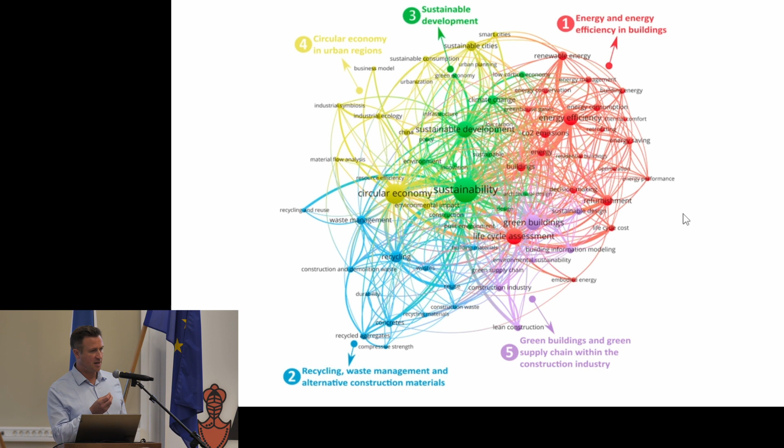Most of the time, when you explain that to people, they are ready to do something, but they don't know where to start, because speaking about carbon neutral is important, but what does it mean in my daily action, in my daily business? The idea with circularity is that it's the perfect translation of all those theoretical concepts into a daily business activity. That's what I'm trying to explain in this presentation.

So what is circularity? The best definition for this terminology is to compare it with the actual model - the linear economy. In the linear economy, you see your material as waste: you produce it, you use the raw material, and once your product has been installed on a project, after its lifetime, this product can be seen as waste. Last year, a lot of suppliers made important steps with recycling - the recycling economy was a first important action because some of the waste is reused to produce new material.

But when we speak about circular economy, that's the following step, and that's the goal for 2050 - we need to avoid any waste on the project. So it's another level for the goals.

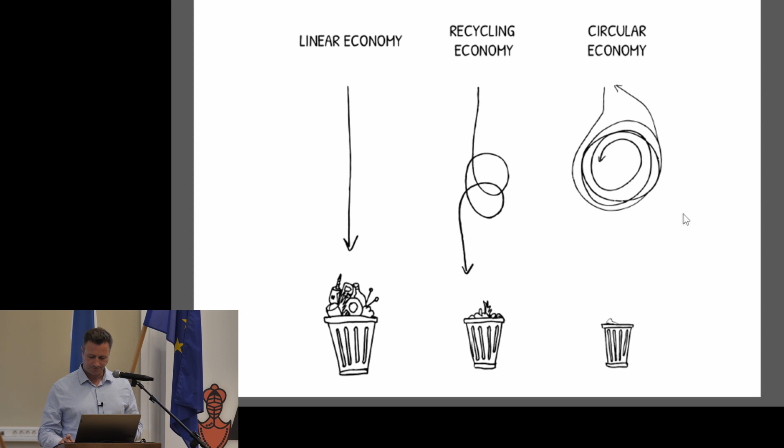The second part is what we call urban mining. Urban mining is actually seeing the material in your building a little bit similar to money you put in a bank - the materials are values, the values of tomorrow. So what do you want to do with those materials when you put them on a building?

And the final phase is what we call the new business model. I'll give you the example of a project with a large flat roof, where you've got a bank who wants to make an investment, and by putting solar panels on the roof, is renting the roof to the building owner.

So you have a sort of collaboration between different partners on a project. You generate value with the available surface. That's the third model.

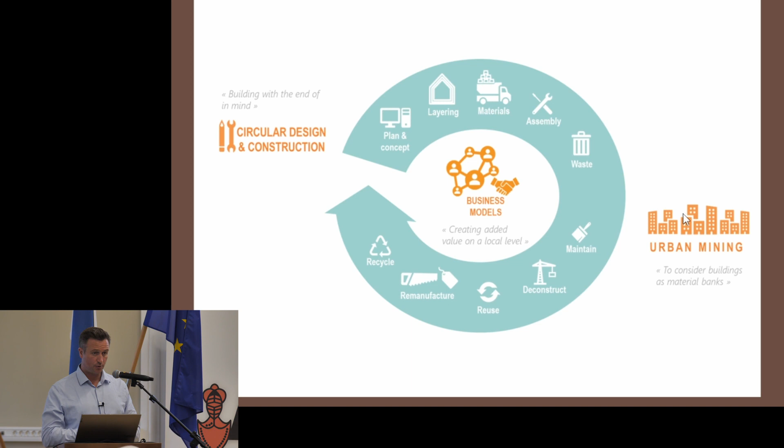What we are doing with our IKO Atelia solution is that we are trying to offer a solution to go from this linear way of thinking, where the material is produced, delivered on the project, built on a site with the application of different services, to go to waste. We are going to this circular world, and we are proposing different pillars.

We will present you 4 important pillars where we built our IKO Atelia solution. We will act on the life expectancy with good repair and good maintenance. We will act on the reusability with demountable systems, and the recycling material, the material we receive after the deconstruction, will be recycled for the production of new product. And we will also show you how we offer services to be a part of the project, also with a specific guarantee for IKO Atelia project.

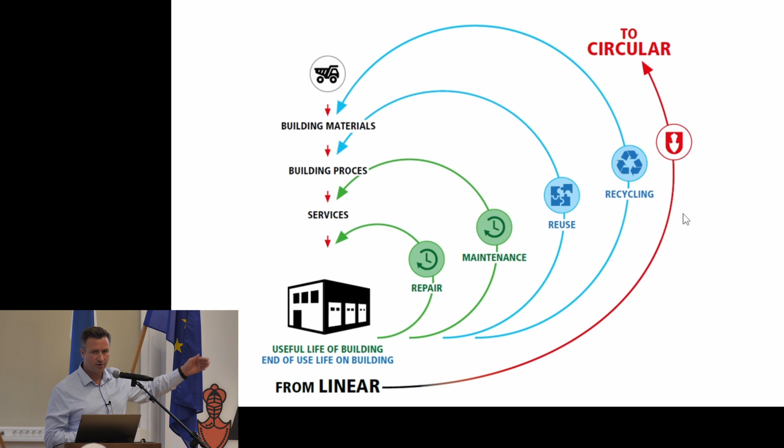The first important pillar, really strategical, is the extension of the life expectancy. The longer your material lasts, the longer your raw material stays in the circle of construction, the better it is for the planet. Really logical: if you apply good maintenance on your project, you will extend the life expectancy.

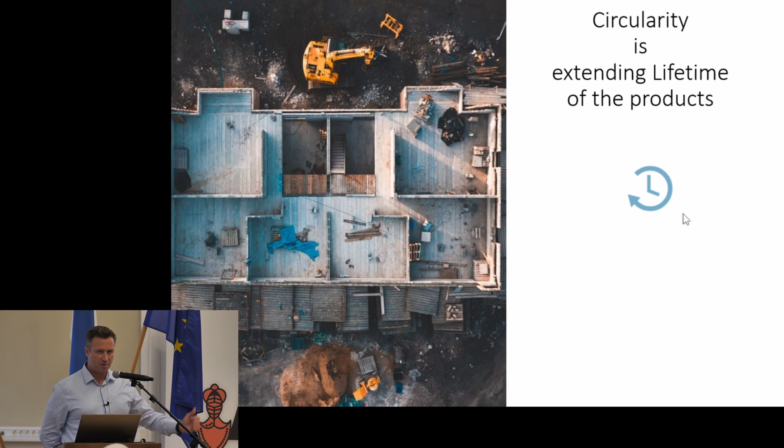The big advantage of bituminous membranes is that they are a traditional product that has existed on the market for a long time. They are a perfect product to apply maintenance to, because when you want to take action on a roof, the new material is still compatible with the existing one. If you want to extend your building with new places, it's perfectly possible to make the connection, and when you have to repair some damages, you can do it perfectly too.

Another advantage of the bituminous membrane, you saw the different projects explained before today. Once the system has been installed, the top bituminous layer is a perfect structure to apply a new layer on top of it.

To give you an idea, we speak about 35 years life expectancy for a bituminous layer today - that's just the standard. With the application of a new layer directly on the existing one, you can extend the life expectancy for another 35 years, and that's something really specific for bituminous membrane. Most synthetic or single-ply materials don't offer this possibility, so it's important to take into account this technical possibility when evaluating the life expectancy of the product.

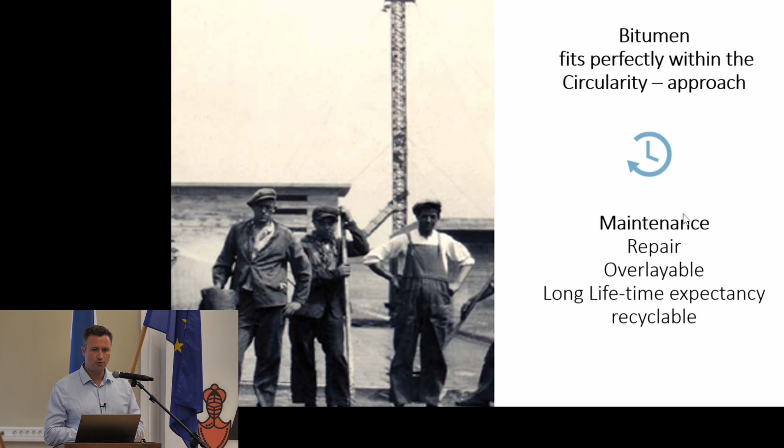The last important point for the bituminous membrane is that they are really easy to recycle. You can use the existing bituminous membrane on your roof and introduce it into the recycling process to produce new bituminous membrane. How does the recycling process work?

We've been doing it since 2014, so we have good experience with it. During the production process, when we do quality control on the membranes, some of them unfortunately don't pass for production reasons. Those membranes we recycle today directly for the production of new bituminous coating.

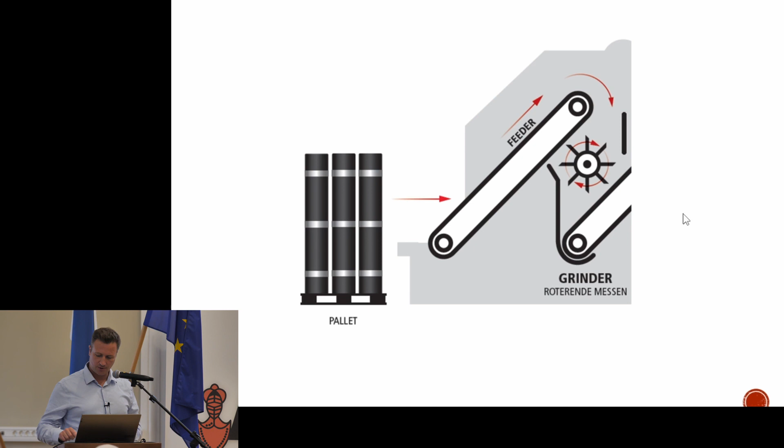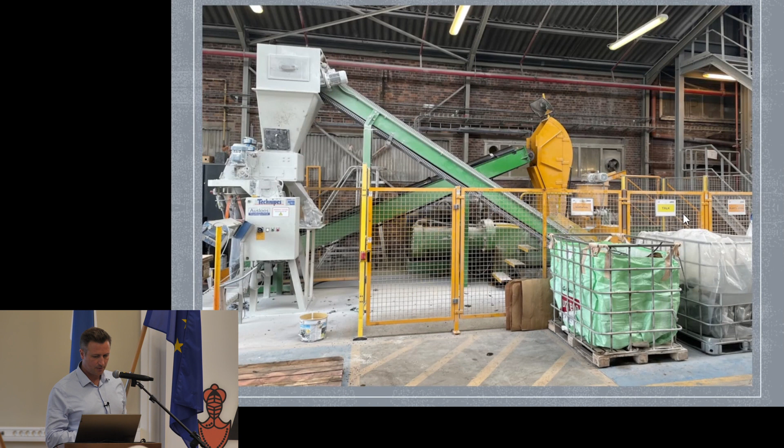You see on the picture the rolls are taken to the site. We put them on a feeder, which goes into a grinder to make small pieces to introduce into the production of bitumen coating. On the left side you see the rolls going on the feeder, following the process into the grinder - the pieces you see in gray. At the end of the process you receive that kind of material.

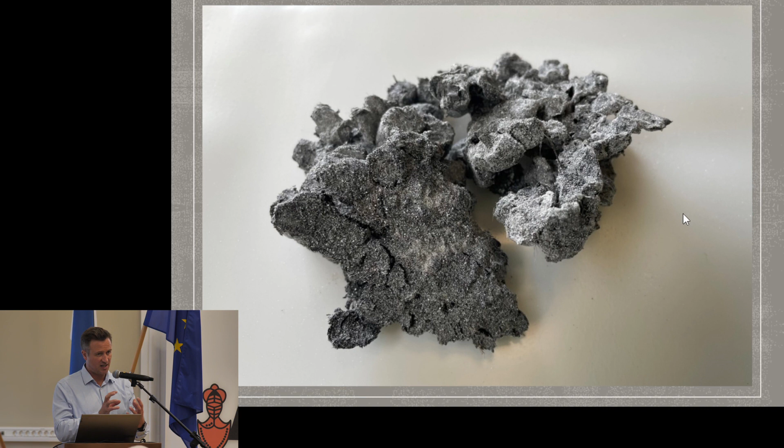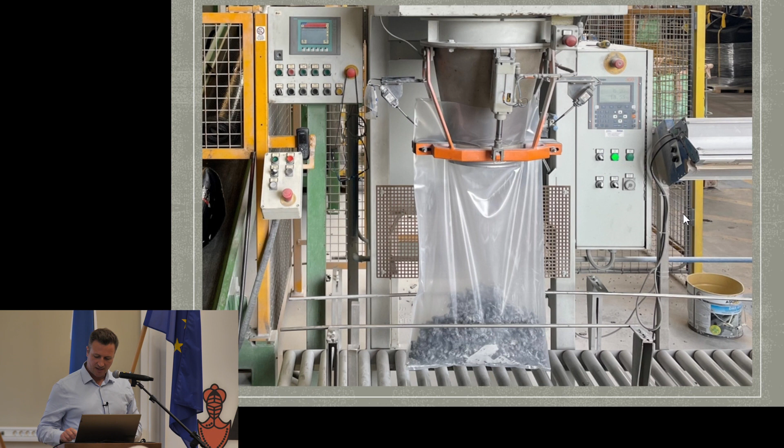The grinder makes material of approximately 5 or 6 centimeters diameter. We put some talc on it so it doesn't stick, and that material is put into plastic PE bags. Those bags are stocked on a pallet to be reintroduced later in the production process of the bituminous membrane.

But we've got two problems with this technology. The first is that it's quite labor intensive - it requires an operator during the whole process and takes a lot of time. The second disadvantage is that because of the size of this recycled content, when you reintroduce it during production of the new bitumen coating membrane, you're adding a cold product into a warm product, so the warm product cools down and you have to put in more energy to warm it again. So it's quite costly in the production of the new membrane.

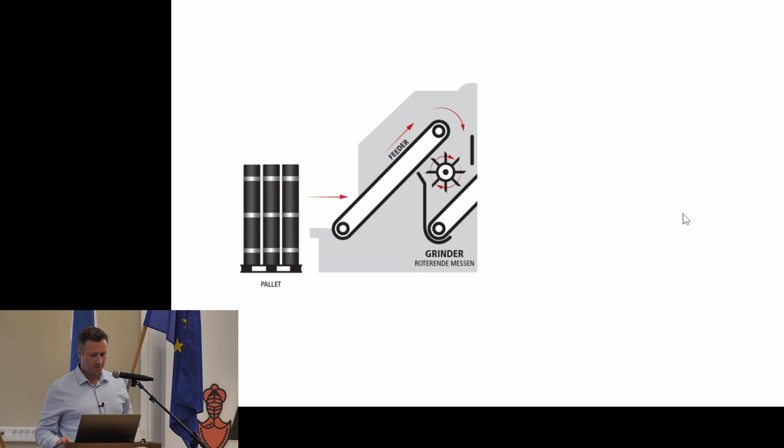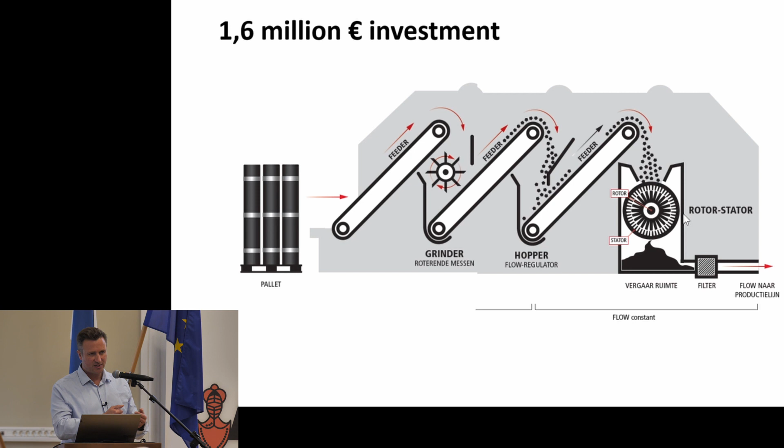When we see the evolution of recycling content and of the market, we know that we need to do better. That's why we decided to make an investment of 1.6 million euro for the installation of a second part on this machine. This will extend our capacity to be more effective in the recycling process and to put more recycled content in the material. We will reach a volume capacity of 1,500 tons recycling content, making IKO the most important supplier on a recycling level in Europe.

This machine is a well-known, state-of-the-art machine in Europe. Some colleagues in America are already using it. We know that the effectiveness we can reach with this machine will help and support us in the development of our circular trajectory.

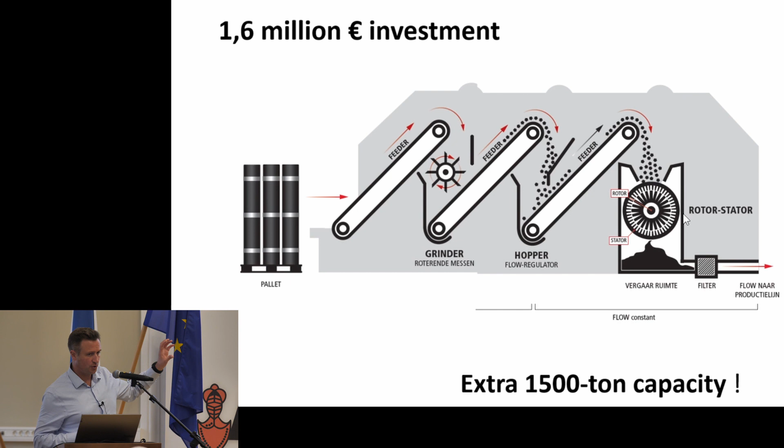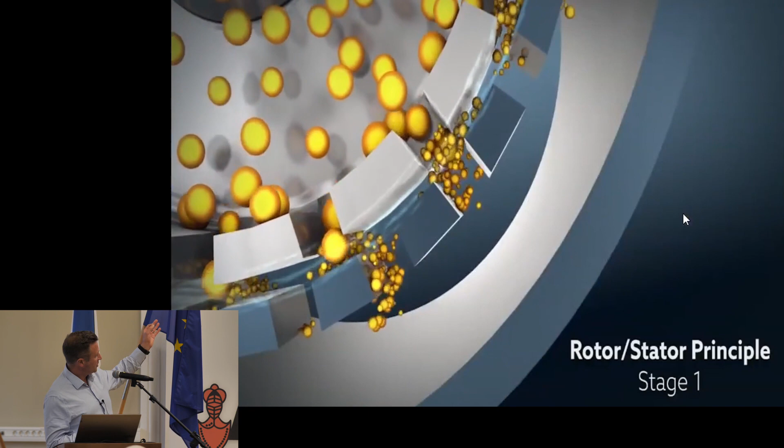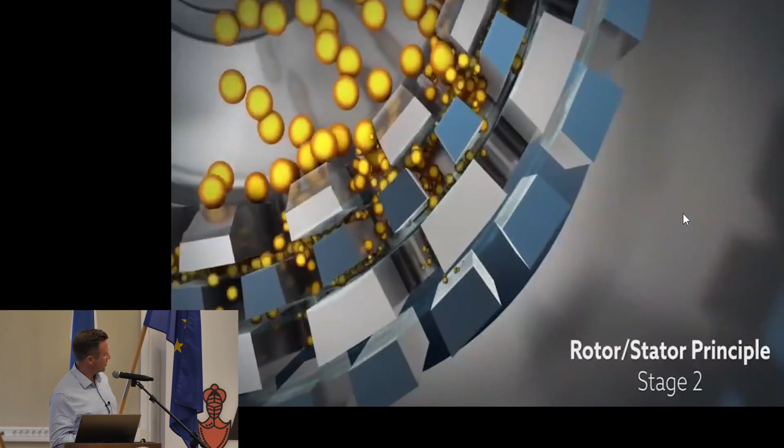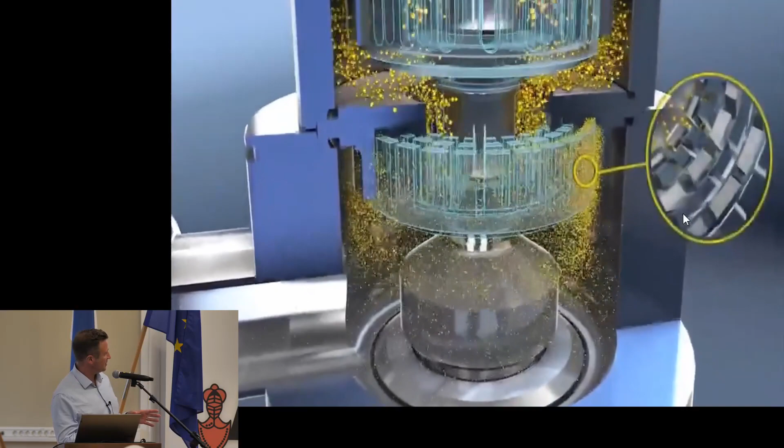This machine is called rotor stator technology, and I'll show you with the video how it works. After the grinder, the bituminous pieces are put into the rotor stator principle, and the advantage is that you can make really thin pieces. The end result after stage 3 will be approximately 1 millimeter in diameter, starting from 6 centimeters.

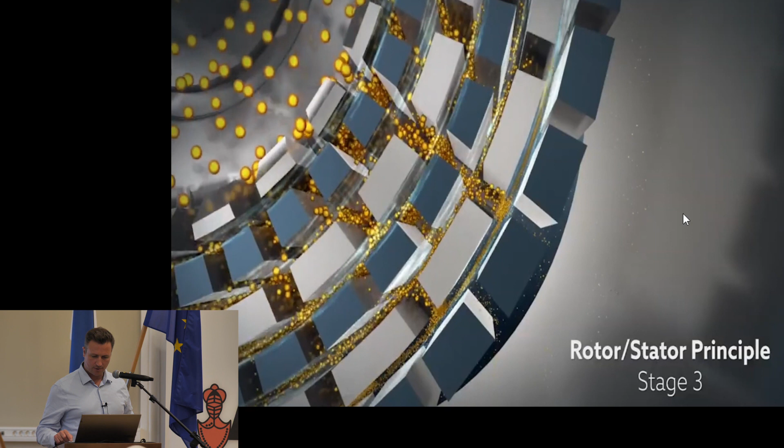The advantage is that this process works warm, so we can reintroduce the recycling content directly into the production of the bituminous coating without needing extra energy. This will clearly extend our recycling capacity, but there are some issues to take into account, which I'll explain in more detail.

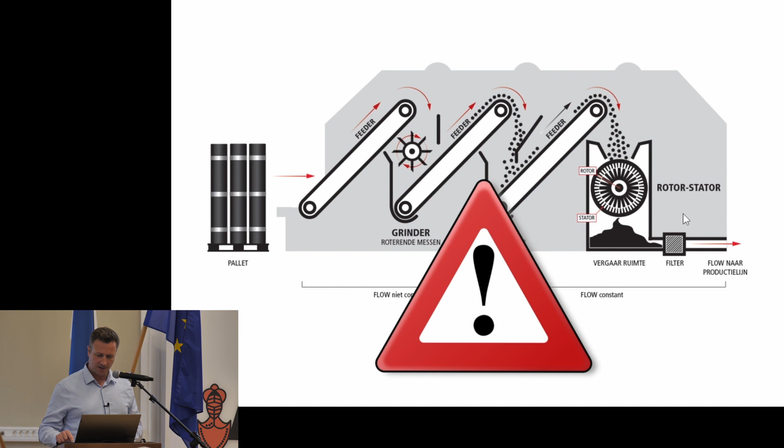Today we have three possible sources for the bituminous pieces we recycle. The first is the residues of production, which we've done since 2014. We have the advantage that there's no transport needed since it's already available in the factory, and we have it clean with no contamination. It's just a piece of roll we put back into the production process, so this first source is under control.

The second source is the cuttings we have on site, which we spoke about in the circularity process. There's a lot of volume available when contractors are cutting pieces of membrane, and we need to think of a way to reuse it. It's really difficult to organize independently, because imagine each supplier on a project organizing transport to take material back to their own factory - it would cost a lot and have a big impact in energy too.

So what we're doing in the Benelux today is managing that on a sector level. We sit around the table with our competitors and organize it generally - for example, if IKO has 50% of the market share, we work with a separate organization who takes back all the cuttings of the project and distributes them pro rata to each supplier, so IKO receives 50% back of the cuttings. This is already reality, and we'll begin next year with that kind of initiative.

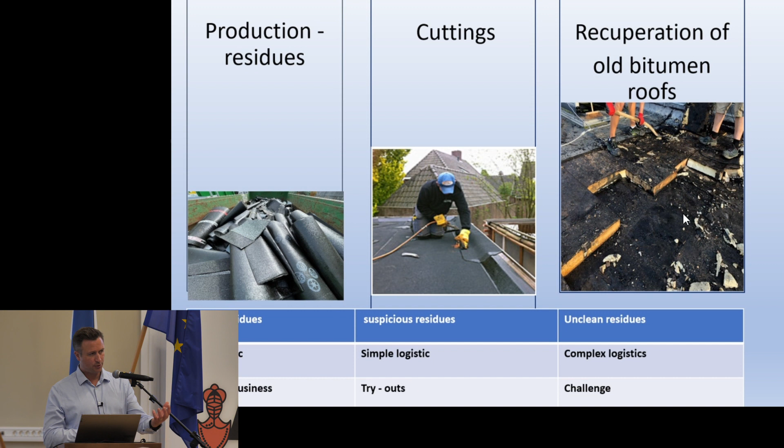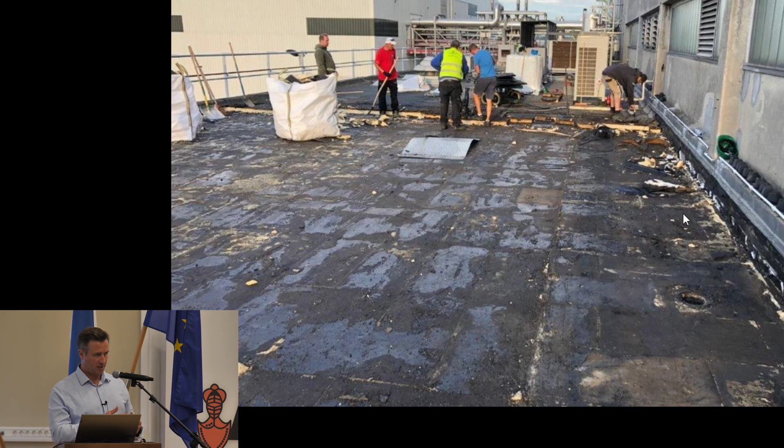The third point, a really important one, is the available material on the roof. Today we have a lot of bitumen roofs available in each country, and at the end of their lifetime this material can be used to produce new membranes. But you understand that with this type of glued system - using glue or bituminous coating to weld the different elements together - this material is much harder to put into the recycling process. In recycling, you get contamination between the layers: pieces of wood, metal, insulation, making the process much less effective.

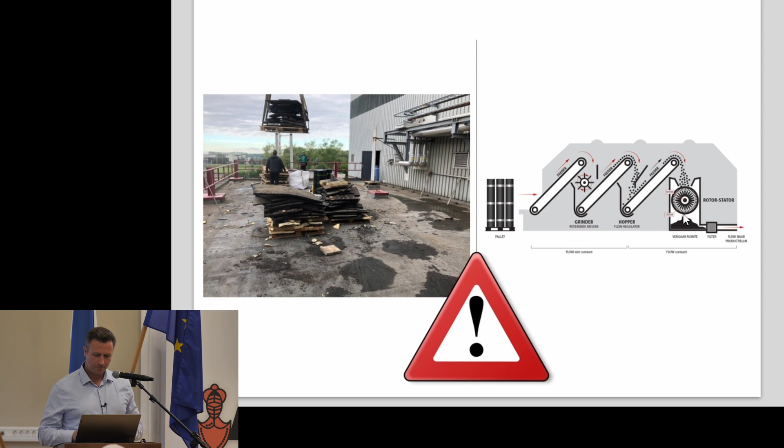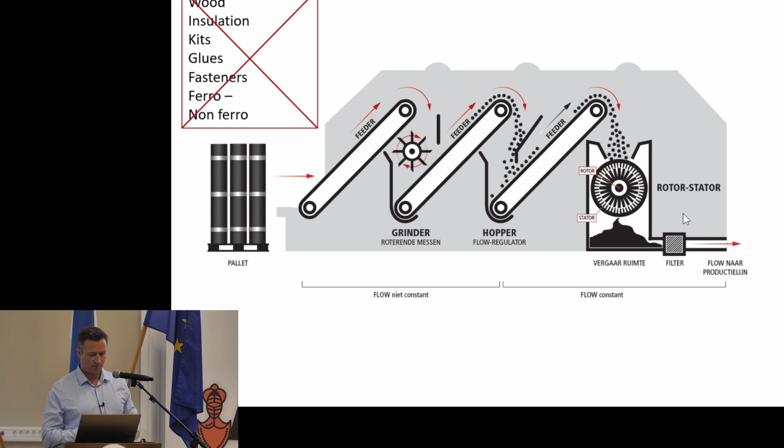So we were challenged to make a match between this existing way of working in some countries and the technology we're developing today. For this technology, no wood, no insulation, no kits, no glue, no fasteners and no metal pieces are allowed. We thought a lot about it and discussed it with many contractors and different actors in the market, but the result is clear: we need to design to disassemble.

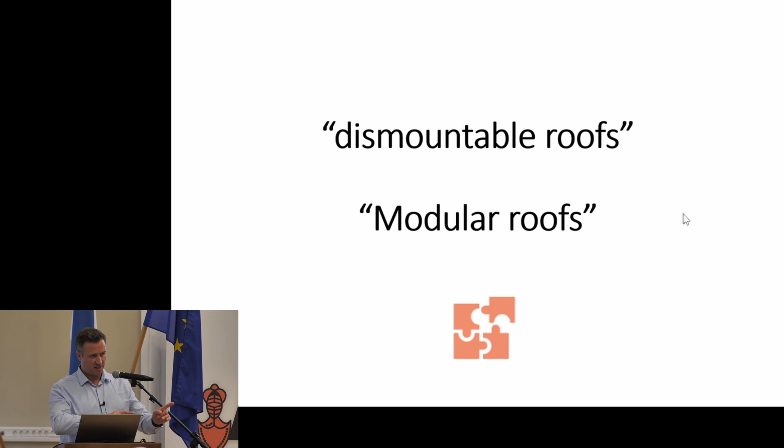We spoke about this in our first slide when discussing building in layering. This means that when designing a roof, we need to take into account the end of life and make the roof modular, so that at the end of its lifetime we can dismantle it and separate each layer without contamination between them.

With this technology, it's an advantage because when you need to dismantle the roof, you just have to remove the fixation and you can reuse the waterproofing layer separately.

It's also important to understand that not only the roof system needs to be taken into account, but you also have to think about the details. I speak about the fixing, I speak about the water outlet, the roof trims.

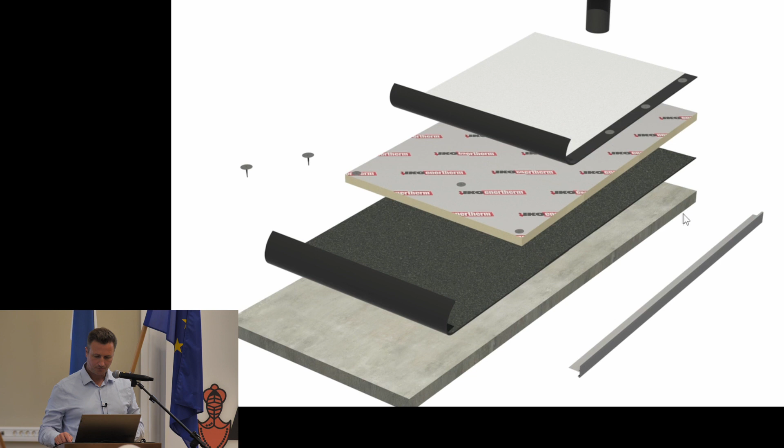The other solution is the loose-laid system with ballast. That's also a good system to separate each layer without any contamination. For this system, the idea is that you put your vapor barrier on the structure, your insulation board, and your waterproofing loose-laid, and you put a ballast on top of it to keep it stable for wind stability again.

So we are really proud today to show you this really important second principle of our IKO Atelia roofing system. IKO Atelia is the name of the system. Atelia means infinity in Greek, because what we want to support with this system is the idea that your raw material will stay in the circle as long as possible.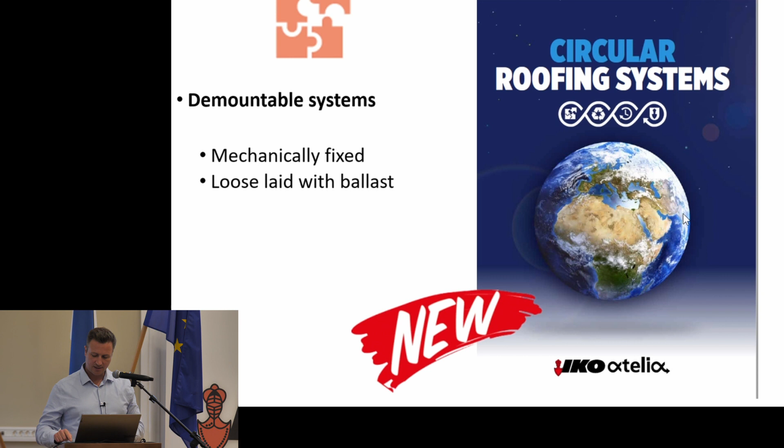The material solution is based on four principles: the demontability we already spoke about, and the extension of life expectancy with bitumen we already spoke about. We still have two different pillars to explain. But for the IKO Atelia roofing system, we will only allow a demontable roofing system, so only mechanically fixed and loose laid with ballast, with attention for the different details.

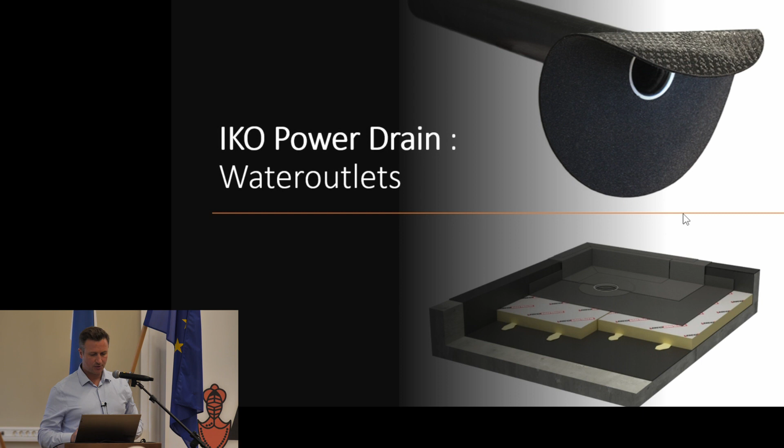When we speak about attention to detail, we already want to offer solutions. The first one for the water outlet is the IKO Power Drain. IKO Power Drains are prefabricated water outlets. You have a polyethylene tube and a bituminous slab fixed in the tube with an aluminum ring. It exists for a vertical water outlet, but we also developed other solutions for horizontal outlets.

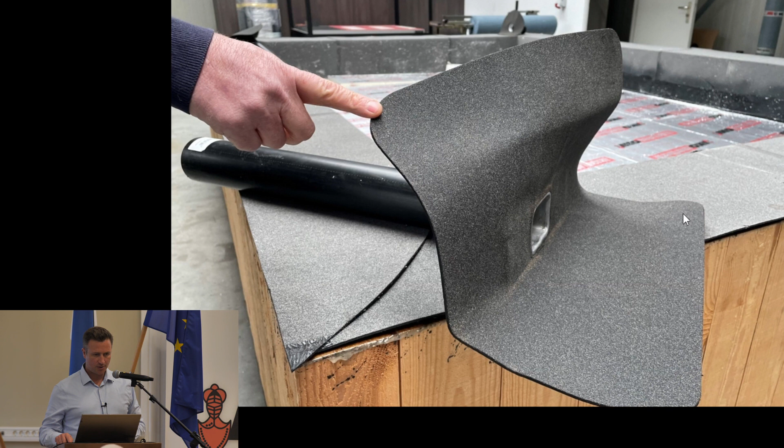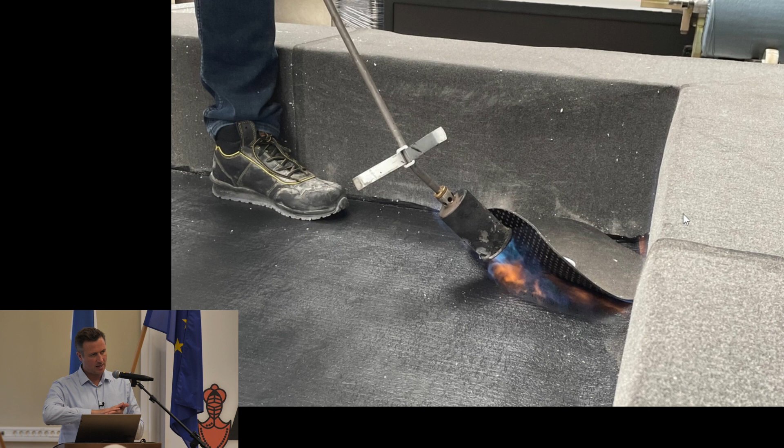This bitumen slab is just welded onto the roofing layer. So if you work with a two-layer system, you will put it between the two layers. But for a one-layer system, the top layer is directly torched onto the bitumen slab of the water outlet. The idea is that when you are busy with the demontability, you just have to cut the water outlet around the aluminum ring, and you can reuse the bitumen slab together with the material for the recycling process. You don't have any contamination of metal or strange elements with the bituminous membrane you are going to recycle.

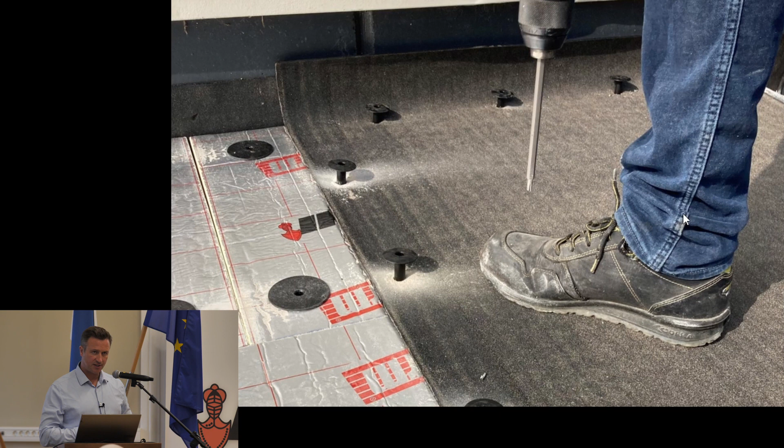The second important accessory is the fixing. We worked together with our partner, Eurofast, to make trials on different types of fixing. And we found a type of fixing which is perfectly possible to recycle together with the bituminous membrane.

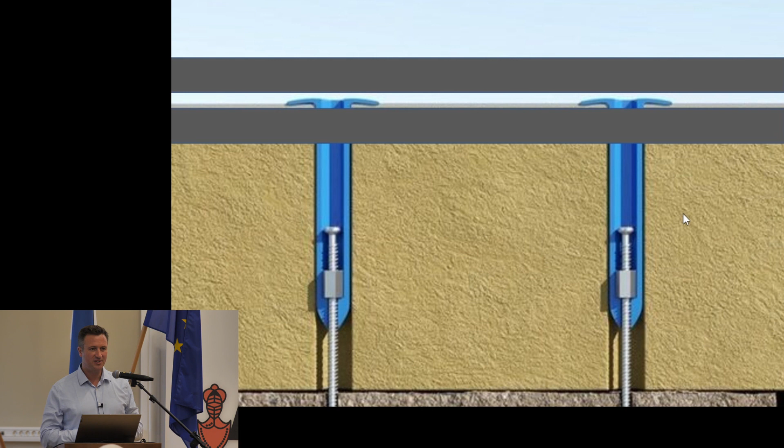So the idea is that when you are going to dismantle the roof, you will actually open the waterproofing layer - that's the two black layers you see on top. When you open it, you just have to cut the fixing under the layer. But the repartition plate you have between the two layers can be recycled together with the bituminous membrane. There is no contamination thanks to the use of this specific type of fixing. They have a whole range of fixings applicable to different types of structures.

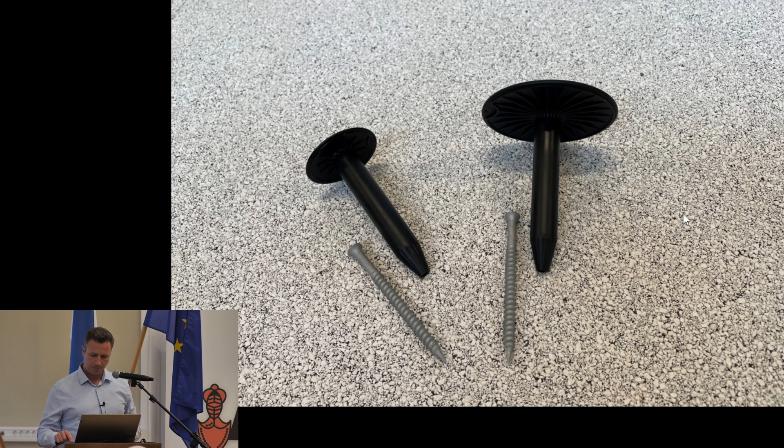Another type of detail really important for the finishing of your roof is the roof trims, so the roof edges.

What do we do when we weld the bituminous membrane on top of it, like we do it normally? You always have a connection between the two materials, and it's difficult to separate when you are busy with demountability.

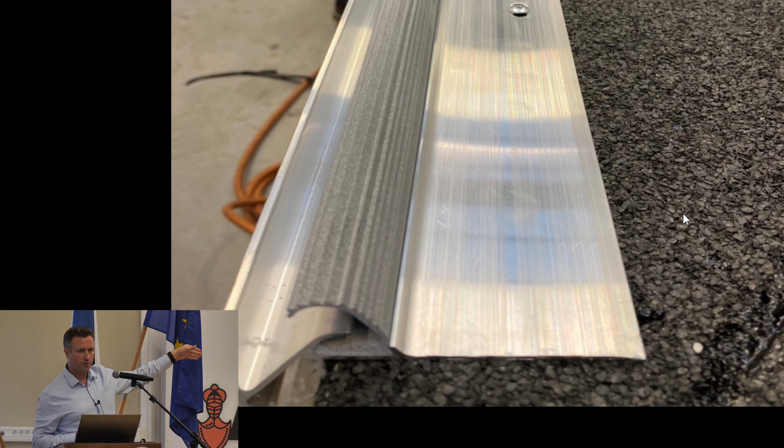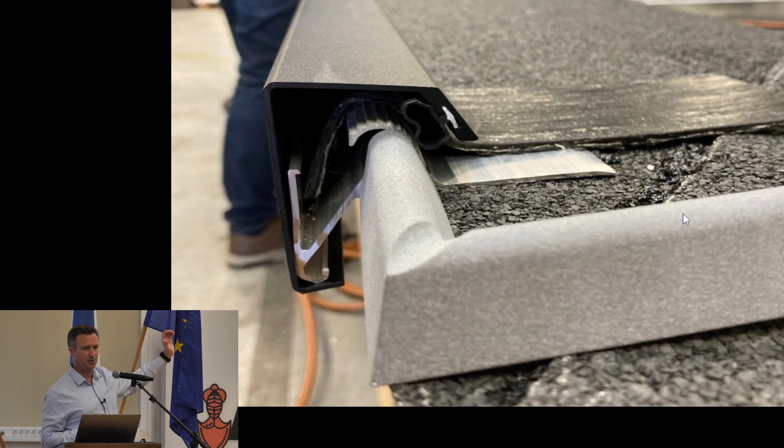Today we see a lot of new systems like the clip system, for roof edge clips. You have the base you can fix directly on the edge of your roof. You put the needed screws to make it stable on your waterproofing layer, and you use a separate piece of bituminous membrane that you introduce in the clip system. Thanks to the clip action of the second layer, you fix it again to the roof edge, and you just have to weld the last overlap on the top layer to finish your detail.

When you need to dismantle it, you just have to cut the roofing membrane to dismantle the roof edge, and you can perfectly recycle your material in the recycling process without any contamination.

The third important aspect of our circular story is the circular product design, because we spoke about the way how we can recycle the material. It's important also to mention that in the IKO Atelia system, we promote only products that already contain recycling content.

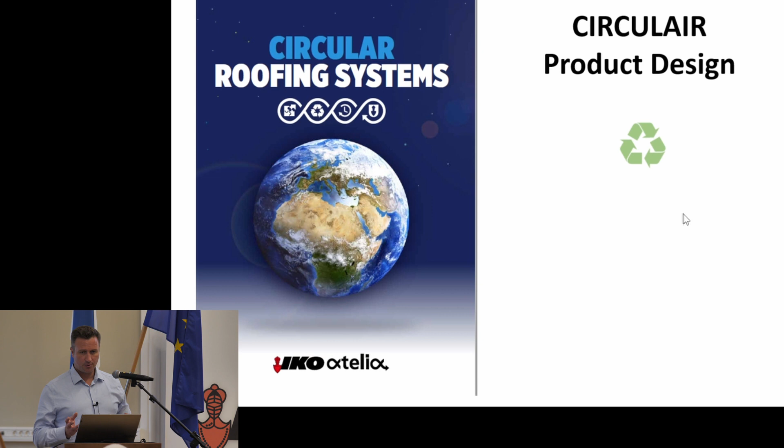So the IKO Atelia products are partially made of secondary raw material. We call it secondary raw material because it can be bio-based raw material, but it can also be recycling content. Both types of product are used to make IKO Atelia products, and that's what we call secondary raw material. A really important thing to keep in mind is that we spoke about the experience of bituminous membrane on the market.

We want to keep that level of expertise and quality. So our idea is to make today's product with a higher percentage of secondary raw material, but keeping the technical characteristics on a stable level. We don't want the addition of secondary raw material to affect the quality of the membrane and the performance of the product. So it's really important to keep that in mind. Our goal is keeping the quality while adding secondary raw material.

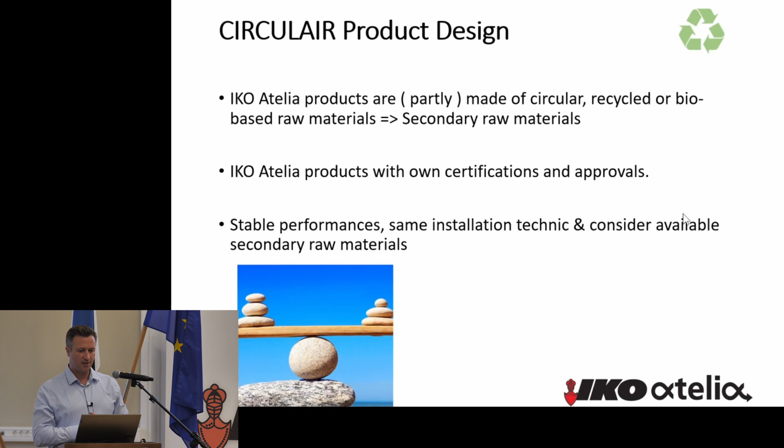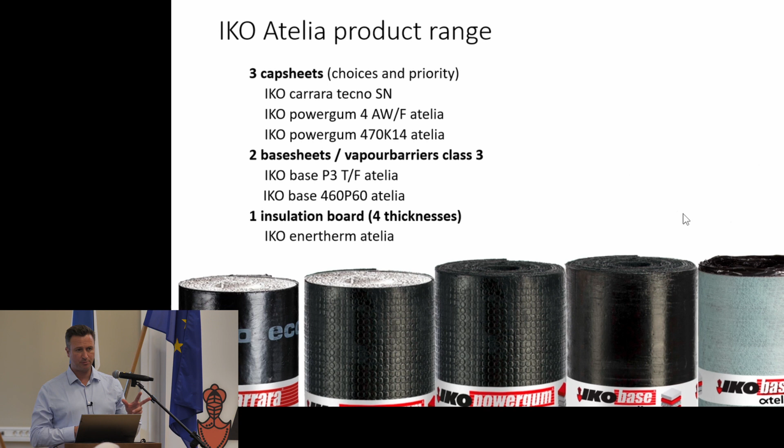We will make the needed process to develop the certificate, especially on those types of products. In the IKO Atelia product range, we've got 5 bituminous membranes, 3 cap sheets, 2 underlayers, and 1 insulation board.

The first layer is the IKO Carrara Tecno SN. That's the one you saw on the IKO IKEA project. That's an SBS cap sheet you can mechanically fix on the insulation board. It's made from SBS bitumen.

Thank you. Okay, is it better now? Okay, I can repeat if you want.

For the IKO Carrara Tecno SN, we are finishing the product with white granules. Our goal is to upgrade the reflection on the membrane. With those white granules, we have an SRI value of 82. The mineral finishing is also treated with titanium dioxide, what we call the air cleaning technology, so it has an impact in the cities on the quality of the air. And we've got the fire-resistant Broof t1, t2 for the different regulations.

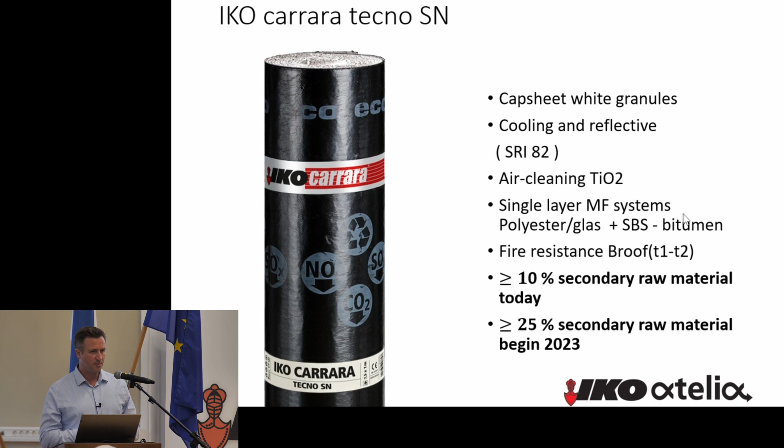As explained, today we are adding a minimum of 10% secondary raw material for the production of this product. But thanks to the installation we are going to finish at the beginning of next year, 2023, we will extend this secondary raw material percentage to 25%. So it means that beginning 2023, the IKO Carrara Tecno SN will already contain a quarter of secondary raw material, which is pretty interesting as a result.

In the Scandinavian countries, in Estonia, we are working with SBS product, but other countries like Belgium and the Netherlands are more focused on APP membrane. So we have also launched an APP solution. The IKO Powergum AW/F is an APP membrane with white finishing, another type of slate. That's why the SRI value is a little bit lower, at 45. But it has the same air cleaning technology and the same fire resistance.

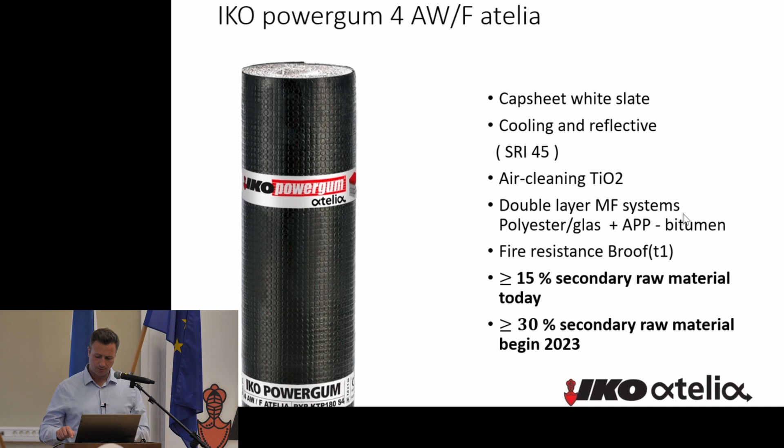And for this membrane, we are coming from 15% and going up to 30% beginning of next year in percentage of secondary raw material. But you see that other membranes are also available.

We spoke about the loose laid system with ballast. When you've got the ballast on the roof, you don't need a white color to finish your membrane. And because the granules and the slate are not secondary raw materials, they affect the percentage, but when you don't have those materials as finishing, you can already reach 35% secondary raw material beginning of next year.

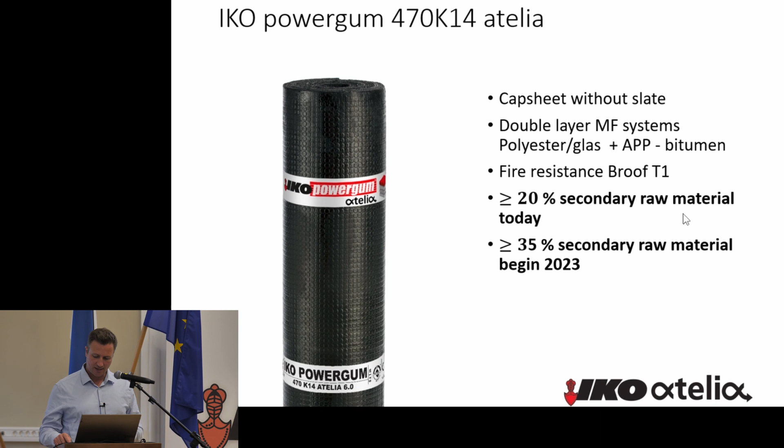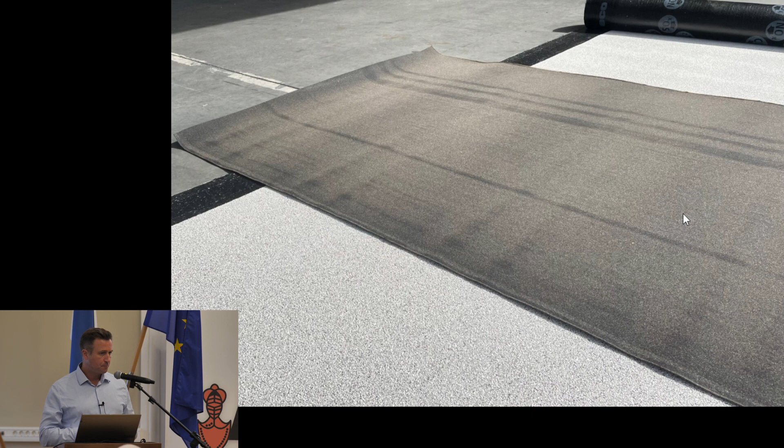So really interesting result. You have different options for your top layer, but I would say the most important question is: do you need a black membrane or a white membrane? If you are working with a standard mechanical fixing system, choosing the white membrane is a good choice, because you don't only get reflectivity, you also get other advantages.

When working on your roof with solar installation, Reyo explained it, but also with technical installation, the fact that your white membrane reflects temperature means you have lower temperature during summer, and better efficiency of your technical installation during those months.

It's also important to note that when building circular, you have to take into account all the details. The recuperation of rainwater, for example, is an interesting aspect you can perfectly do with the white membrane. That's something you cannot do with the unfinished membrane you see in the picture.

On an underlayer level, where we don't have to reach UV resistance performance, we are already speaking today about 40% secondary raw material in the production. That's a really interesting result thanks to this new recycling installation.

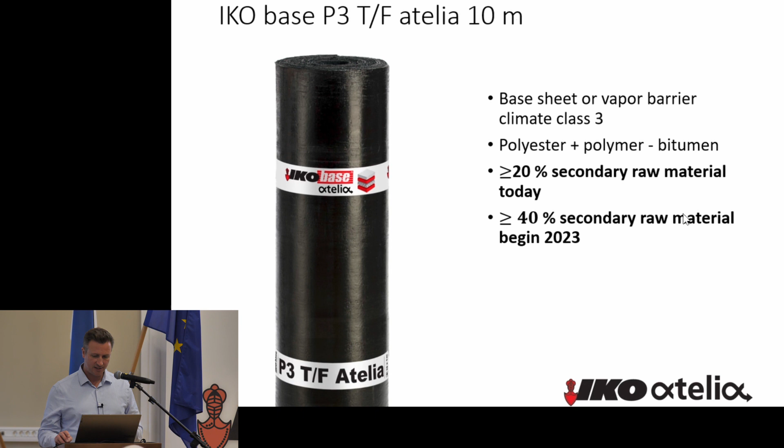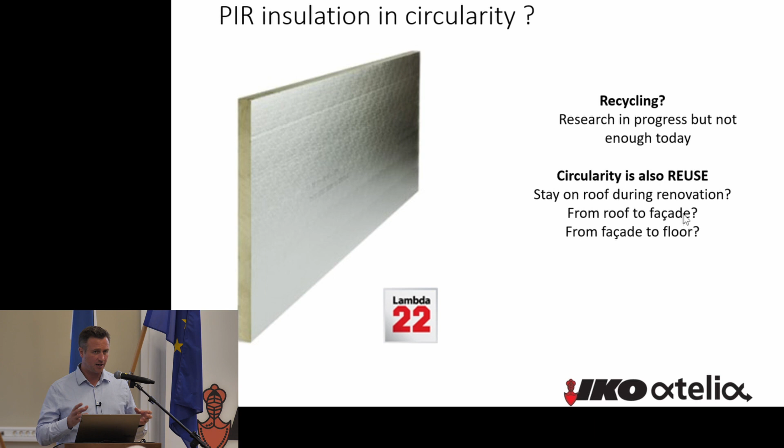And what about the insulation board? One of the big advantages of the PIR insulation board is that it is stable for technical performance, so this type of product can be reused for other applications.

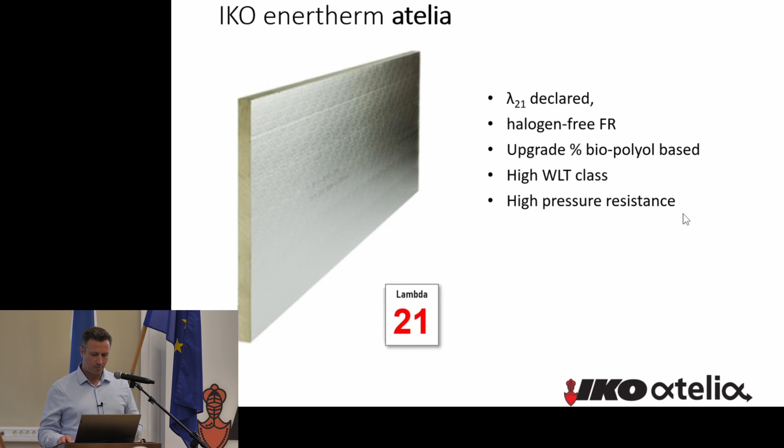We developed for the IKO Atelia project a specific panel with a lower lambda value of 0.021. This lambda value offers better performance for the insulation value.

So you see different choices you can make, not only on the product but also on the system. When you want to develop this white result, you can work with the one-layer system mechanically fixed. That's exactly the system that was installed on the IKO Atelia project.

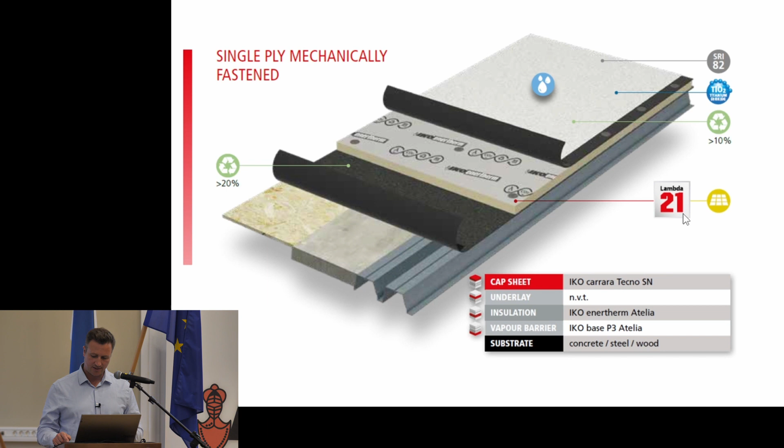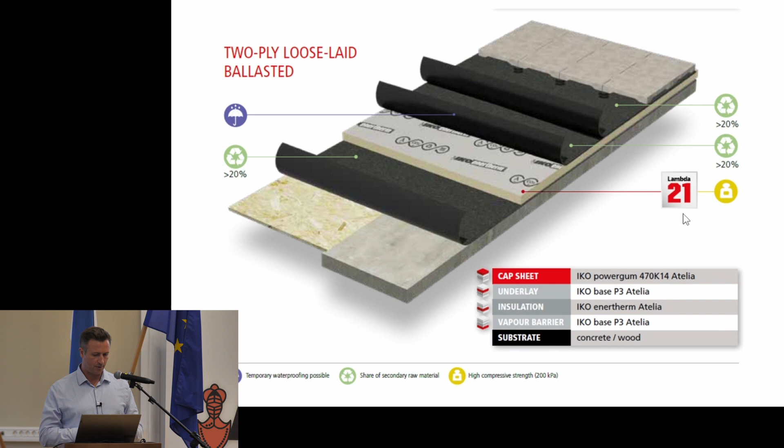But if you are working in the city and looking for a utility roof to use for other purposes, then it's good to work with a double layer system to offer much more security and a traffic possibility.

The last important piece of the puzzle I want to present today is the IKO warranty. We spoke about the life expectancy, the demountability, the product design, but we need to be part of the project as a supplier.

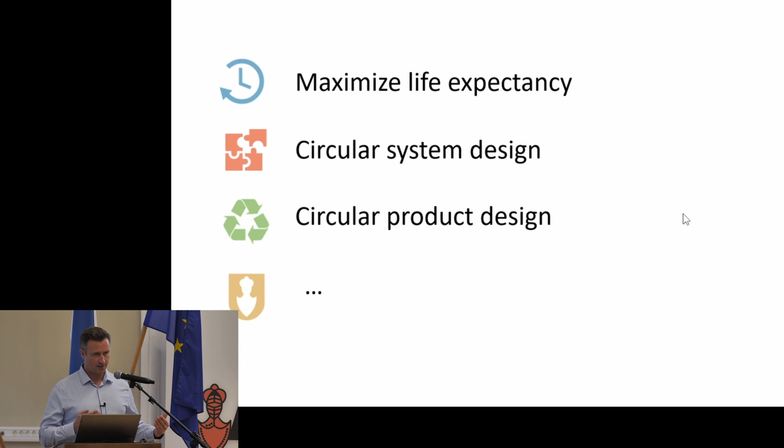That's why IKO offers, alongside the waterproofing warranty, what we call a take-back certificate. For each Atelia project, we give this certificate to the building owner, representing our engagement to take the material back after its lifetime for our recycling project.

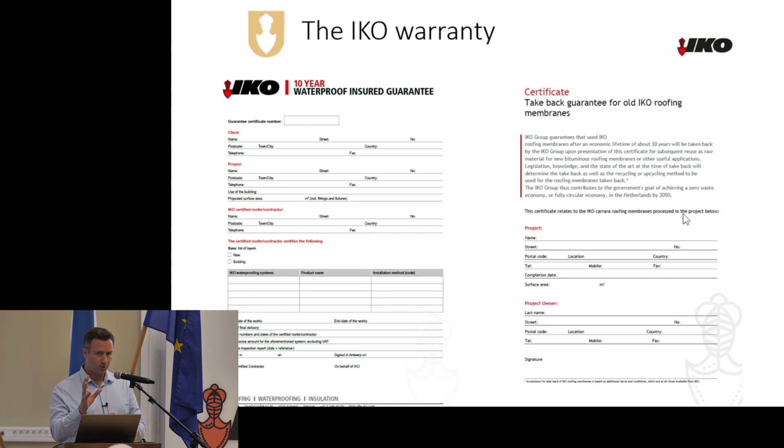This certificate is important because it takes into account all the details of the project, fixing included, and gives us the possibility to have a material passport to upgrade the recycling process after the lifetime.

We also offer trainings, like Bart showed in the experience center. We want to be part of the project with the contractor to show them how to build an Atelia roof and how to deconstruct it.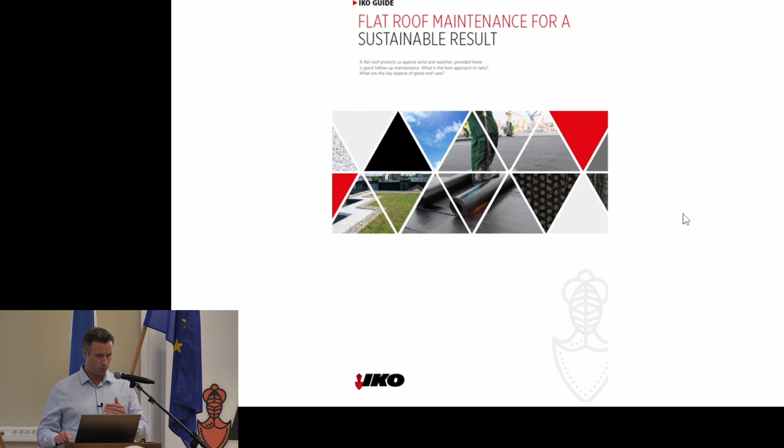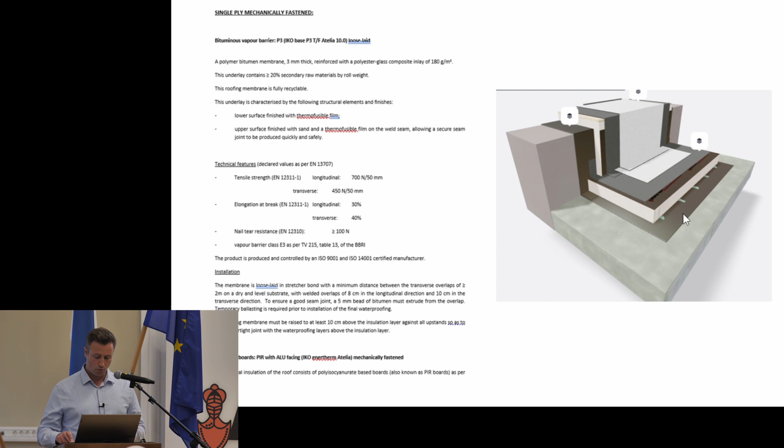We will also give advice on maintenance, which is important to extend the life expectancy. And we are certainly there for the architect with specification texts and details to finish the roof upstands, for example. So I am approximately finished with the presentation.

Last point: coming back to the two questions I asked, I tried to answer why it's important, but also why it's important to do it now. The drivers of the circular economy are 2030, 50% less material, and 2050, we need to be circular. The roof we are building today needs to be circular because 2050 is within 25 years.

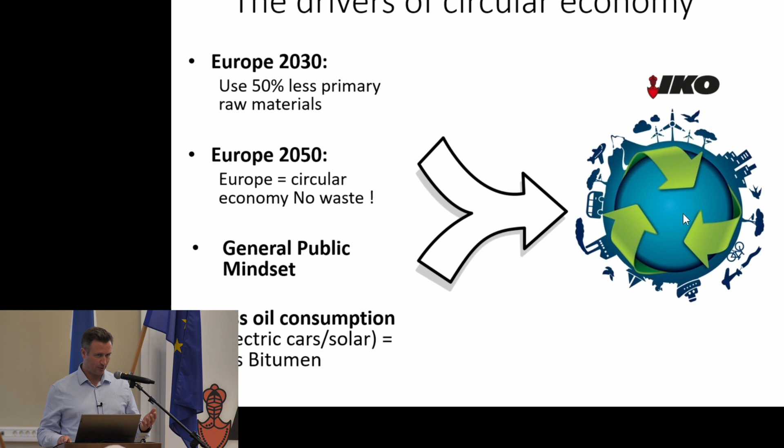And with a life expectancy of 35 years, we are already above it, so the change is now. The roof of the future we need to build today. And you need to take into account that circularity begins to be profitable. We see a lot of investors investing in circular projects, so circularity is a good way to make sustainability more profitable.

The road to circularity is a long journey and a discovering journey, but we certainly need you to organize it together with us. Thank you for your attention and have a good conference.